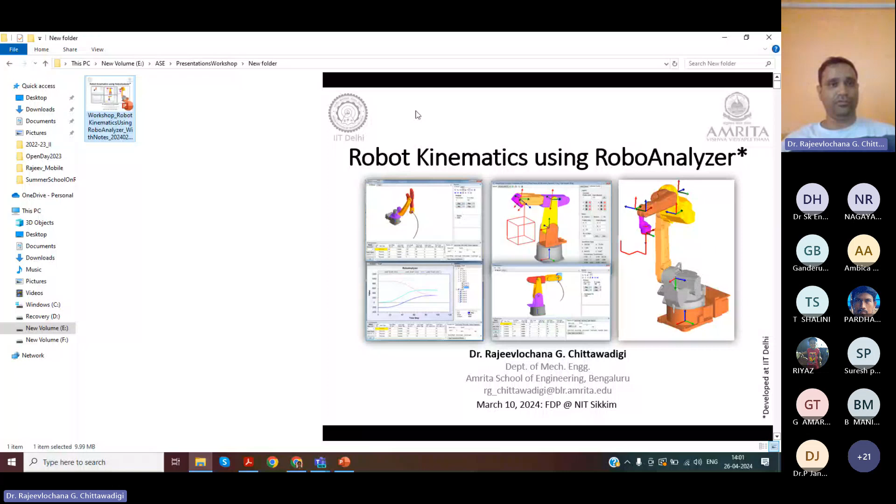Let me show you a folder which has all the sessions that I have conducted so far. My first session was in 2016, all the way to today's session at Vasireddy Venkatadri Institute of Technology. Just a count of it, you can see it is almost 53, so more than 50 sessions have happened like this. Obviously there'll be a lot of learning from both sides - I'll be trying to share whatever I know, and I'll also be looking at your response in between.

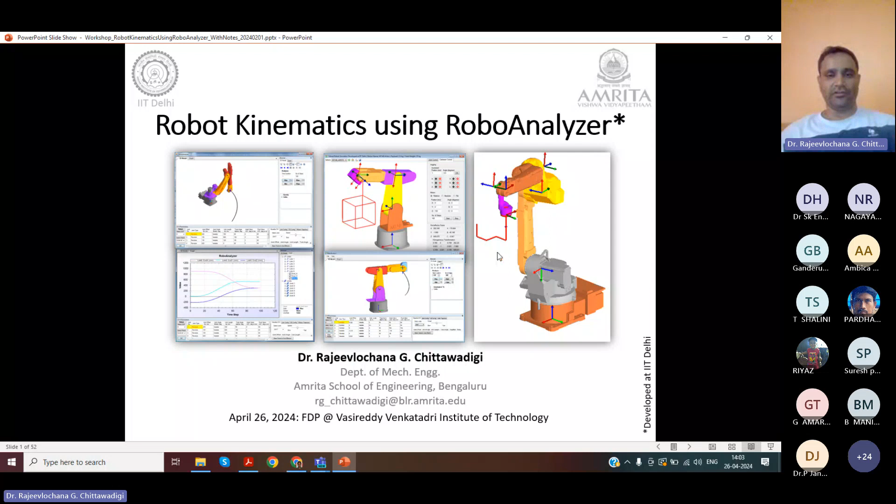The topic of my session today is robot kinematics using RoboAnalyzer. RoboAnalyzer is a software I co-developed at IIT Delhi, that is what is mentioned here. And currently I'm a faculty in Amrita Vishwa Vidyapeetham in Bangalore. These are some of the screenshots of our software, some of which I'll be demonstrating towards the end of this session.

I suppose the audience is from different aspects of engineering. So some of these topics are specific to mechanical, but otherwise, let's say robotics is interdisciplinary. So obviously, whatever simple mathematics that we'll be covering, it is applicable to many fields, including computer graphics and CAD. Here are some of the contents that we'll be covering.

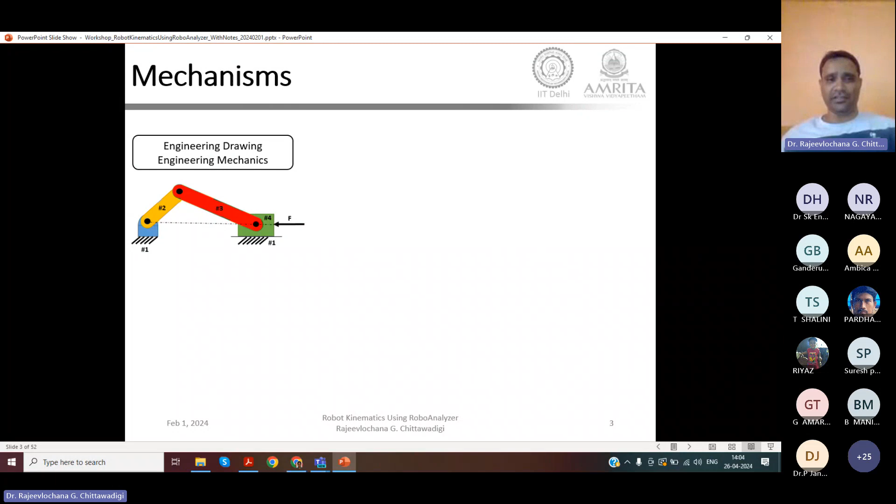For those who belong to mechanical or otherwise, when we go to robots, we have to study certain topics. This is also the way the curriculum of engineering, especially mechanical engineering, is structured. We deal with subjects such as engineering drawing, engineering mechanics, which was also sometimes common to other branches. Then specifically, we deal with machine drawing, kinematics of mechanisms, and also we have to learn programming.

If you don't know programming, it is very difficult to survive in this engineering market. So once all this is covered, then we deal with other subjects such as strength of materials and dynamics of machines - the complexity keeps increasing. And finally, we deal with something known as design of machine elements, where the exact shape and material are selected, and also stress analysis and other things are covered.

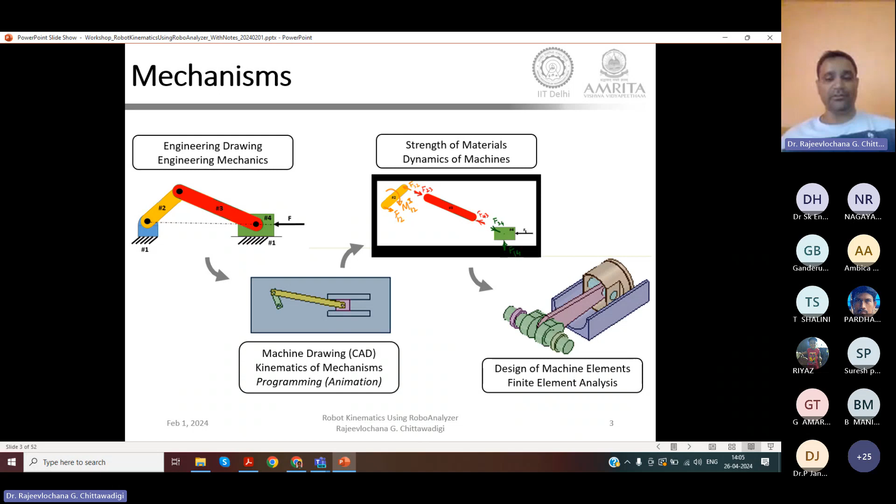So these become precursor or prerequisite courses to the robotics course, because robotics only comes after all these courses.

Some of you already have heard of the word mechatronics. Mechatronics is a combination of mechanical, electronics or electrical, and computer science. Typically, mechatronics systems are not multi-purpose, meaning you have a system that works only for one particular application. For example, FASTag at a toll gate: when a vehicle comes, the FASTag RFID sticker is sensed, it computes, and the gate opens. As you can see, it has an interdisciplinary nature, and it's a perfect example of mechatronics. Robotics, I would say, is part of mechatronics, but also slightly different.

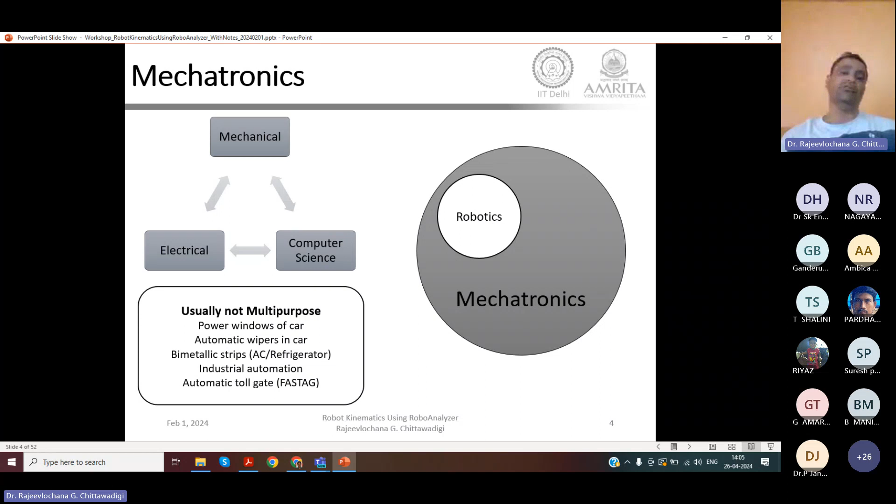How is it different? Robotics is a field related to a robot. What is a robot? That will come next. Robotics deals with the study of mathematical models where input and output characteristics are understood. Then we deal with the design of a robot, where different dimensions and components are chosen. Then we develop a physical prototype and a virtual prototype, which is very important when you actually make a robot. Then we have to apply it for some good cause.

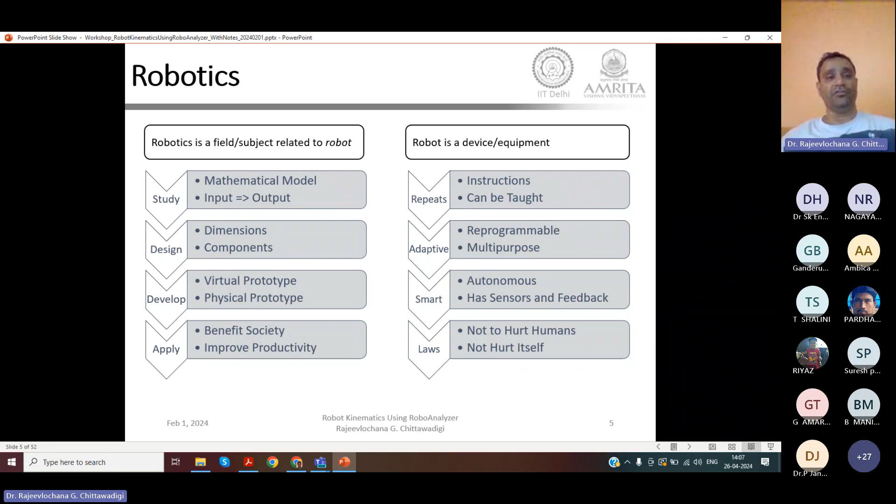What is a robot? It is a device or an equipment. Here are some keywords you should know: a robot repeats instructions, it can be taught, and it is adaptive in nature, meaning you can reprogram it and make it multi-purpose. It is also smart, because it has sensors and can take automatic or autonomous decisions. Finally, a robot has to follow certain laws. The summary of these laws is it should not hurt humans, nor should it hurt itself. So this is, very briefly, what robotics is.

Now I would like to give some insight on what is a robot and what it is not. For example, this small device has two wheels, motors, a circuit, and buttons. Depending on which buttons you press, it can go front and back, rotate, and make a turn. This means it can operate, but it is fixed automation. There is no sensor here, no intelligence here. So this is more like a toy, or let's say, mechatronics.

However, if you have a system like this, which has sensors, programming, and an input-output setup, which can take its own decision, then that becomes a robot. That means it can do multi-purpose tasks, you can use it for different applications. So this is a simple definition or division of what is a toy and what is a robot. Many schools start saying that this is a robot, but it is definitely not a robot. It is the simplest form of, let's say, a robot, but we can't be happy with this as a robot.

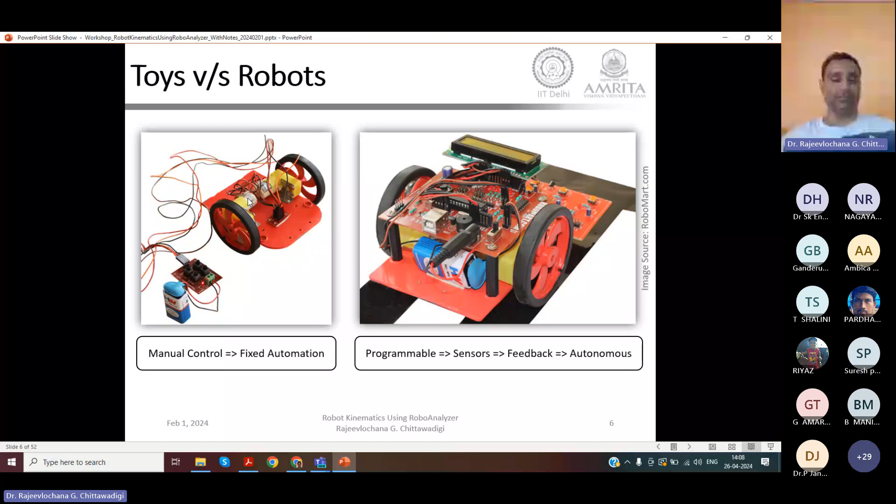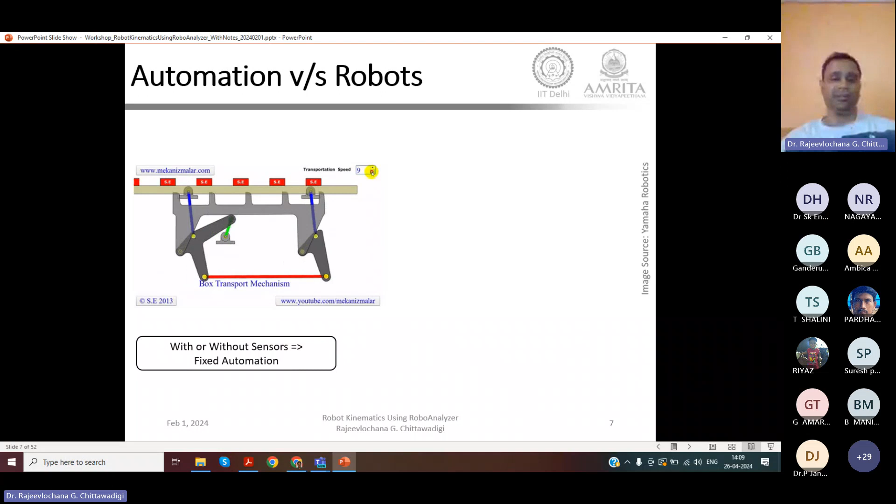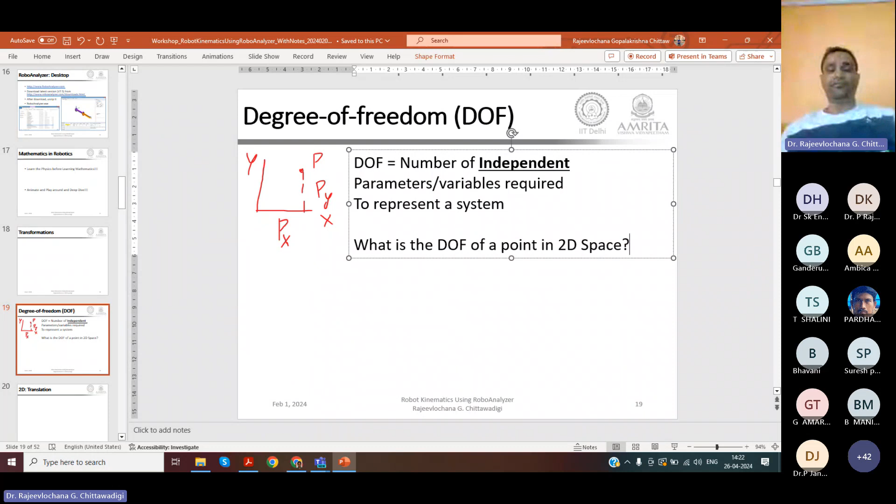I can choose any random value of Px, any random value of Py. So what is the degree of freedom of this particular point? What is the degree of freedom of a point in 2D space? Can you please type the answer in chat? X and Y coordinate - I want a number. Suresh sir says 2, Janardhan sir says 3. Anyone else? Two, Bhavani ma'am says 2. So it's a number, degree of freedom is a number. So that means we need two parameters, px and py, to represent a particular point.

Okay, now let me just try to use a different scenario.

The same point P, can we represent using polar coordinates? Yes, we all have studied this. So where we have a particular point P represented using r and theta. Here also, if I just give you the value of r and theta, you will be able to locate point P. So that means the degree of freedom of that point is still 2.

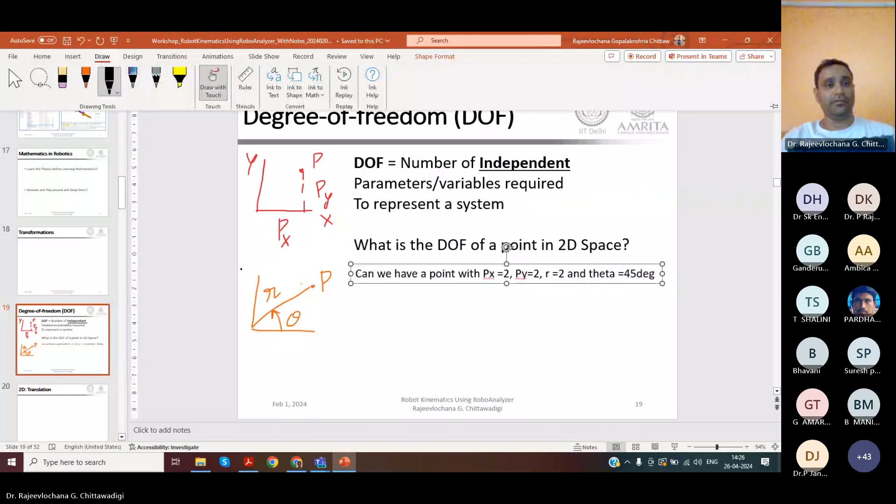Can we have a point with px equal to 2, py equal to 2, and r equal to 2, theta equal to 45? No, it is not possible. Why? Geometrically, that doesn't make any sense. This is py, this is px. If this side is 2, this is 2. R square is equal to px square plus py square, since it's a right angle triangle. So this r value has to be 2 root 2, it can't be 2.

Let's see what people have said. Correct, so 2 square root of 2. Yes, Suresh sir, that is possible. So what I meant to say was, out of these 4 values, r, theta, px, and py, only 2 can be independent and the remaining 2 have to be dependent. Now, how are they related?

Let me type it here. So we have something known as, if px and py are given, then you can write r square is equal to px square plus py square. Okay, so this we know. Another thing is tan theta is equal to py upon px. So if the value of px and py are given to you, the other two values: r is equal to square root of px square plus py square, and theta is tan inverse of py upon px. So this is what we have.

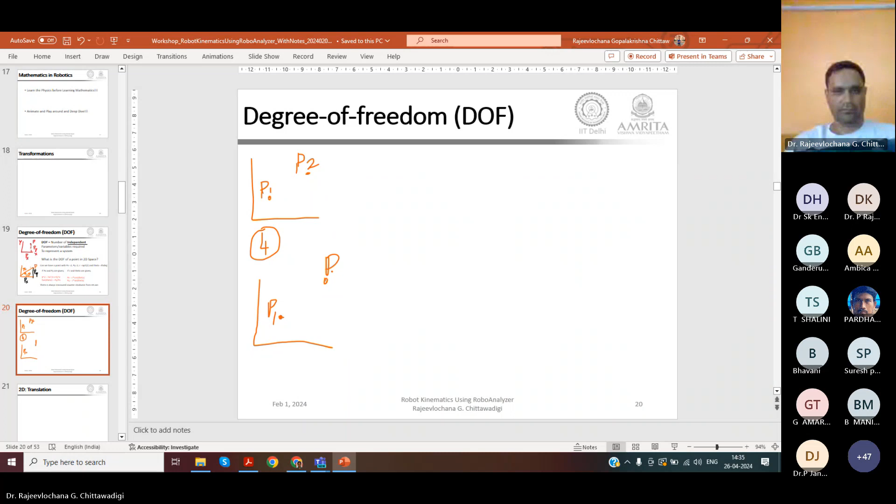Now let us try to do something else. So I'm drawing P1 and I'm drawing P2. And I decided to connect them using a spring. Now, what is the degree of freedom of this system? There's a point P1, there's another point P2, and there's a spring connected between these 2 points. Please mention the degree of freedom of the system.

Okay, Bhavani ma'am says 4, Deepika ma'am says 4. Sorry, Bhavani ma'am says 5, Deepika ma'am says 4. How about others? We'll reach robots in the next 5 minutes, so please bear with me.

Number of turns - that's interesting, number of turns. It's not important because we just have to know what is the state of the system. Number of turns, radius of the spring, length of the spring - so many factors are there. So what all are required? 4.

Okay, let me try to give it this way. When I drew the system, I drew P1 and P2. So this is exactly the same as above - I just require 4 parameters to draw 2 points. Once the parameters are fixed, then only I used a spring to connect them.

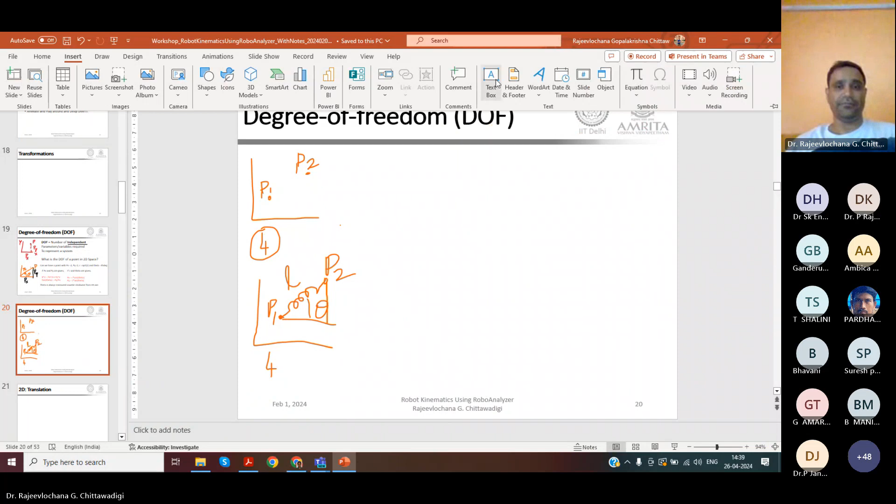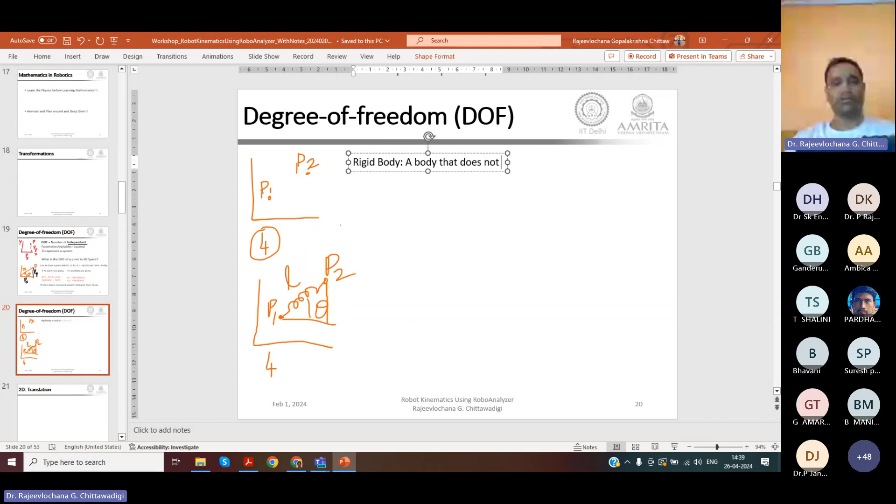A rigid body - let me give you a definition. A body that does not undergo any deformation or shape change when an external or internal force is acted on it. So that means a body that does not undergo any deformation.

Typically for practical purposes, say a mobile cover is usually flexible - if I bend it, it gets bent. However, this mobile is kind of sturdy, it doesn't change shape even if I apply some force. Some minimal change is there, but we can ignore that. Rigid body is a very important assumption in mechanics and in robotics - we assume nothing changes their shape. There's a different topic called soft robotics where you have shape-changing actuators, but that's a different story. We won't be dealing with them.

Now let me give you an example of a rigid body. Most of us are teachers, right? So we use something known as a duster on a blackboard, and we can assume the duster as a rigid body.

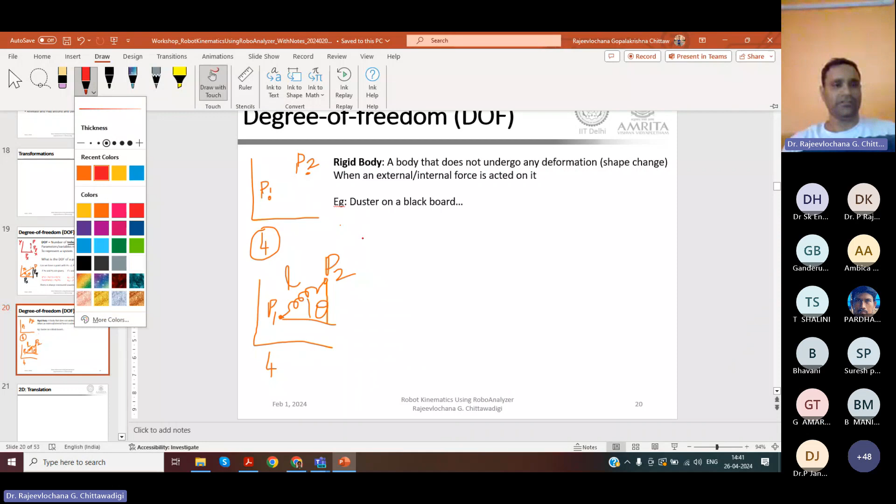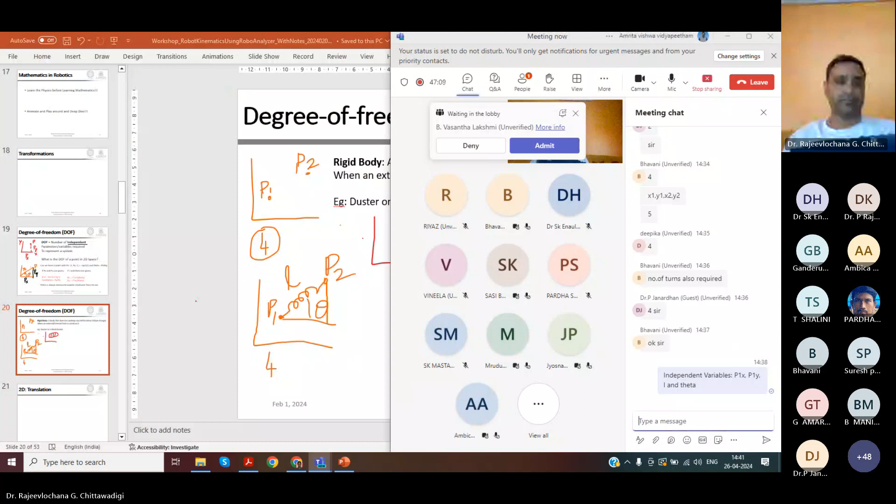Let me try to get some inputs on this rigid body now. Imagine this is a duster and I want that duster to be on the blackboard. It is on the blackboard. Now the question is: in how many directions or ways can we move this duster on a blackboard?

In how many ways can we move it? Can I translate like this such that the duster is still on the board? That's one motion. What is the third motion? I can rotate like this such that the duster is still on the board - I can just rotate the duster. So there are 3 independent motions, and that's what we are going to deal with.

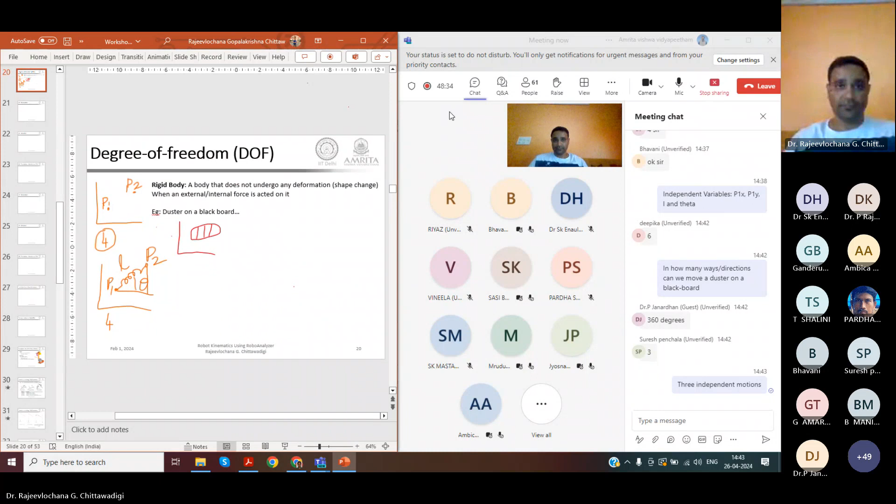This particular thing I can translate like this - I'll call it translation in the X direction. Then I can translate like this in the Y direction. And I can also rotate it. Now this rotation - if X and Y is here, the Z axis is coming out of the plane, out of the board. So this rotation is nothing but rotation about the Z axis.

That means we have a new definition of degrees of freedom: the number of independent motions possible in a system. Tx, though it is in opposite directions, we consider them as one motion because it's just a change of sign - one side positive, another negative. Similarly for Ty and R. So that's why one of the teachers mentioned 6, but 6 is not the correct answer - 3 is the correct answer. 3 independent motions are possible.

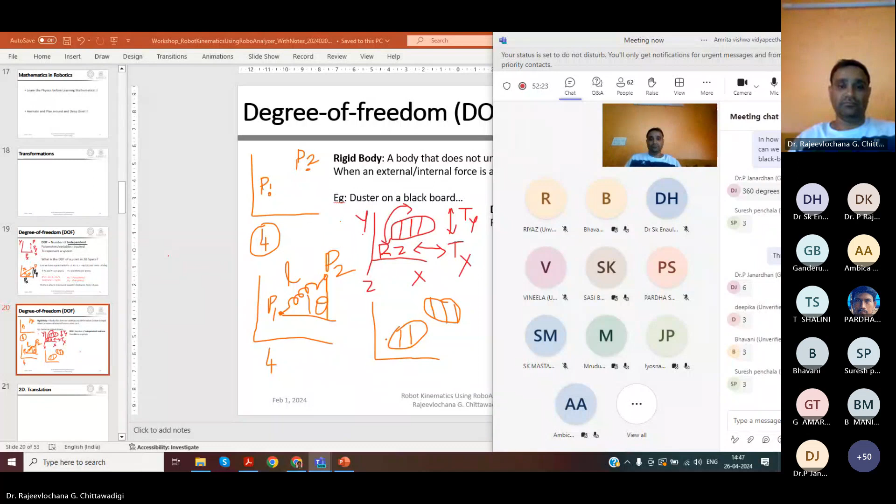This guy, I can translate it. This also I can translate, and I can rotate it. Similarly, this also I can translate in 2 directions and I can rotate in the Z direction. So the total degree of freedom of this system is 6 - 3 for the first body, 3 for the second body.

Okay, I think now people are getting it.

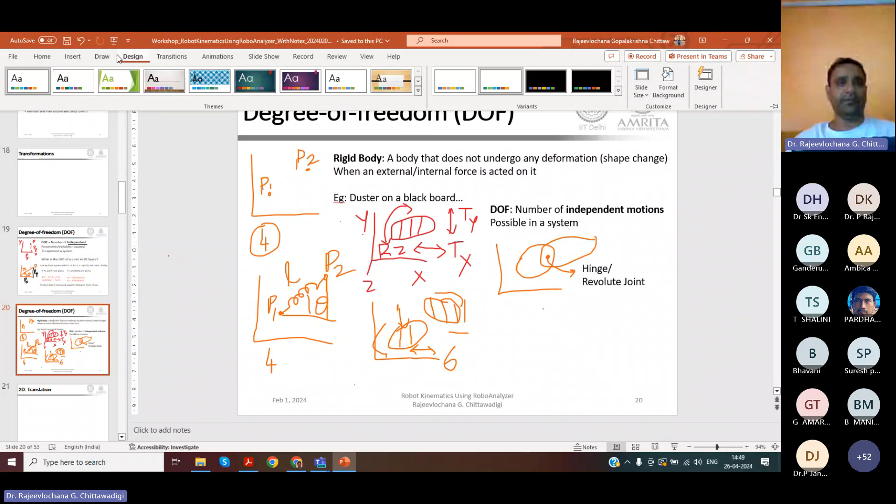So this is body number 1, this is body number 2. What is the degree of freedom of this system?

Okay, others are not answering. There are two bodies. Body number 1 is also free to move, I haven't fixed it.

Anti-clockwise and clockwise are actually the same, one side is positive, one side is negative. So there's a trick in this question. What is the trick? I've not fixed any body, so that means the first body will have 3 motions. I can move the first body freely.

It is not fixed, but the second body cannot have 3 motions because it has some constraint. So I can only have a relative rotation possible between body 1 and 2. This is four degrees of freedom: the first body requires 3 degrees of freedom, the second body just requires 1 rotation. That rotation is an independent motion - I can move it, I can lock it, I can do whatever I want. So degree of freedom of this system is 4.

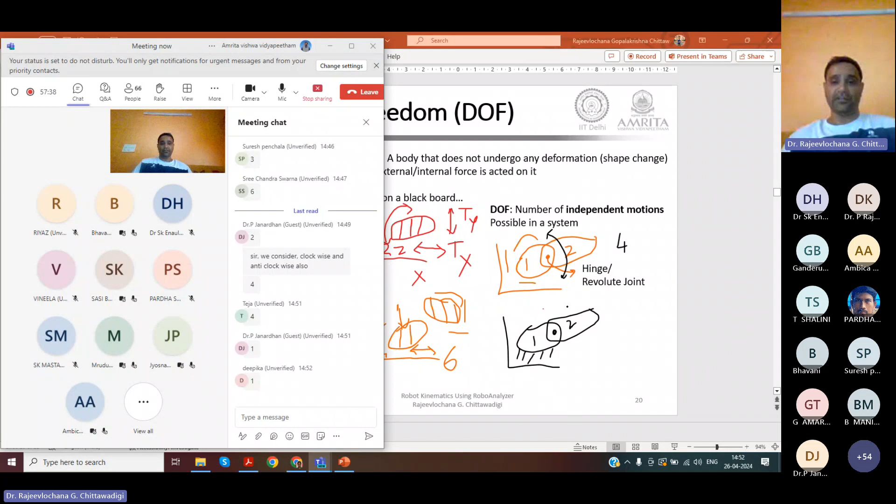Yes, Janardhan sir and Deepika ma'am, degree of freedom is correct. There is only one relative rotation possible. So that means degree of freedom of the system is 1 - only one motion is possible.

Some more examples and then we'll go for the next topic.

Okay, now we have looked at a system. Now let me try to make another system. Please pardon my drawing, I'm using my laptop pad.

These are the bodies, and wherever I'm drawing small black circles, they are our revolute joints or hinges, which allow relative rotation. Can you please type the degree of freedom of the system? Please understand the drawing is very important - you should focus on the drawing and then come up with your answer. What is the degree of freedom of this system? It looks like a human - chest, torso, neck, arm, forearm.

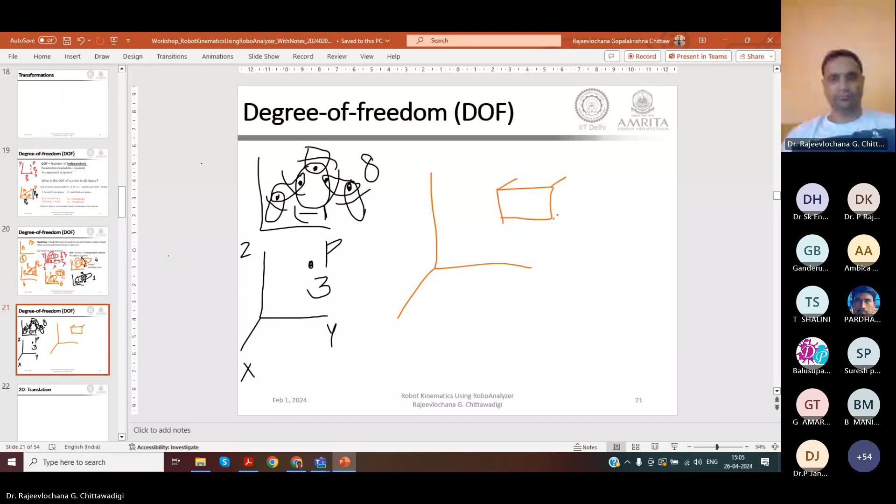Okay, now obviously I can translate in this direction. I can translate in this direction. Similarly, I can translate in this direction. So 3 translations is fine.

Now there are also 3 rotations possible. Let me demonstrate using this rigid body. I can translate in the direction like this, in the direction like this, in the direction like this — 3 independent. Rotation: please observe, I'm rotating about an axis coming towards you, rotating about a horizontal axis, and rotating about a vertical axis. Okay, so there are 3 degrees of freedom.

So translation and 3 as rotation. Total is 6: 3 translation, 3 rotation, total is 6 DOF.

So this is also another important thing that we have to deal with in robots. What is the degree of freedom of a robot? That is one of the common questions that we deal with. Okay, perfect.

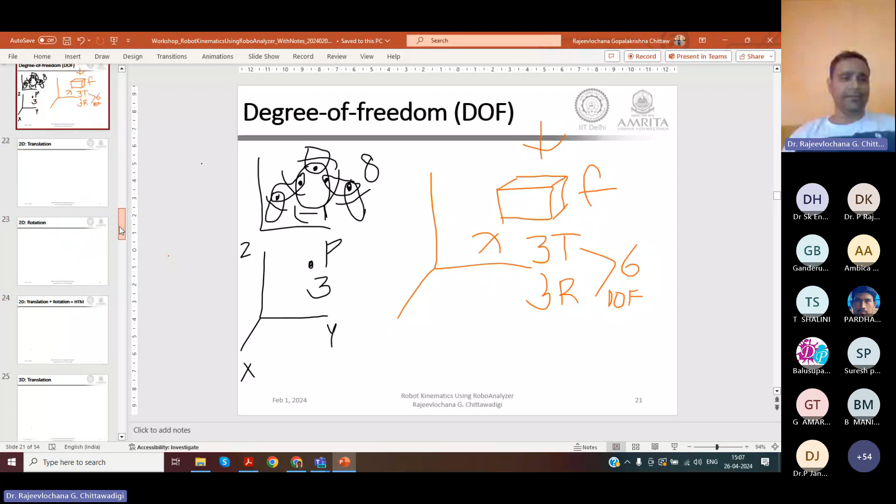Now let me try to cover the other topics slightly fast because we have to cover many things in the next half an hour. So, 2D translation: let's say I have a frame XY.

And I have another frame, let's say UV, another coordinate frame. Earlier, these 2 frames were coinciding. I have one frame, I have another frame, they were coinciding, and I have moved one of them. So the motion that has happened is basically translation. I can translate in this direction.

And similarly, I can translate in this direction. So what is the degree of freedom of this system? If I fix the XY frame, the UV frame is able to move. I can move this frame in two directions — I can translate along X, I can translate along Y. Okay, now the same thing, I can say that I have put it on a rigid body.

So there is a rigid body and I have attached a frame on top of it. So we still have X, Y, and this is U and V. If I just do the translation of this rigid body, I'll require two parameters: translation along X and translation along Y. This information can be given using a vector, let's call it D vector, between O and O prime. D vector will be a two-dimensional vector, so we'll write it in column format. It will have dx and dy. These are two independent parameters. So if I want to represent 2D translation, I can use this vector.

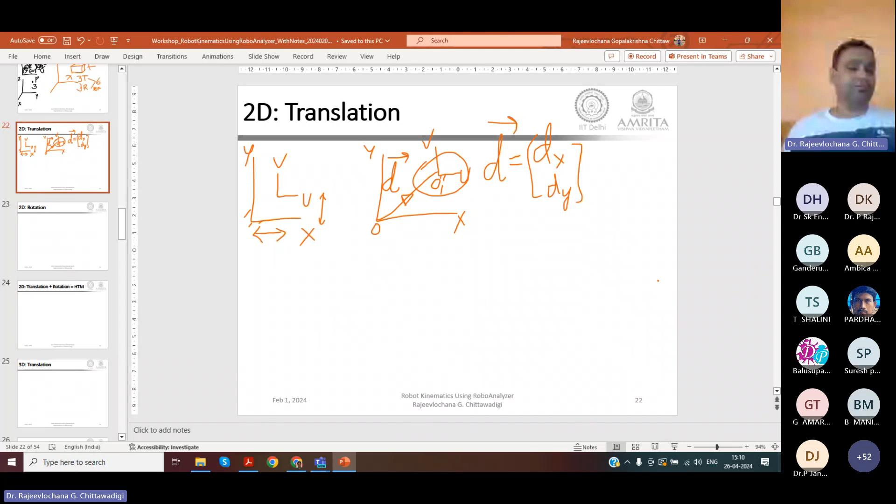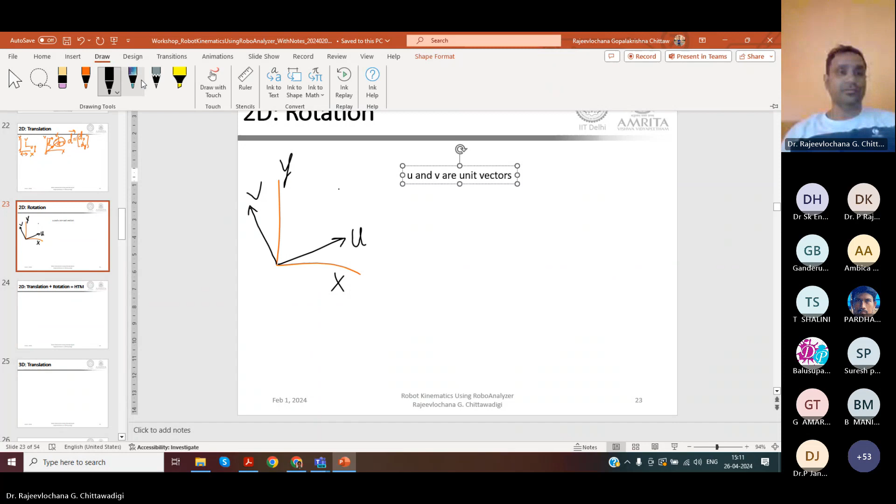Now if I want to represent this system, I will require an angle, let's say theta. If I give you the value of theta, you'll be able to draw this U and V vector straightforward. This is okay for the 2D case, but when we go to the 3-dimensional case, the way angles are specified becomes confusing, because here there's only one angle, but there will be 3 angles — what order we rotate, about which axis we rotate. There are so many things that happen. So one of the easier ways to represent rotation is using something known as direction cosine.

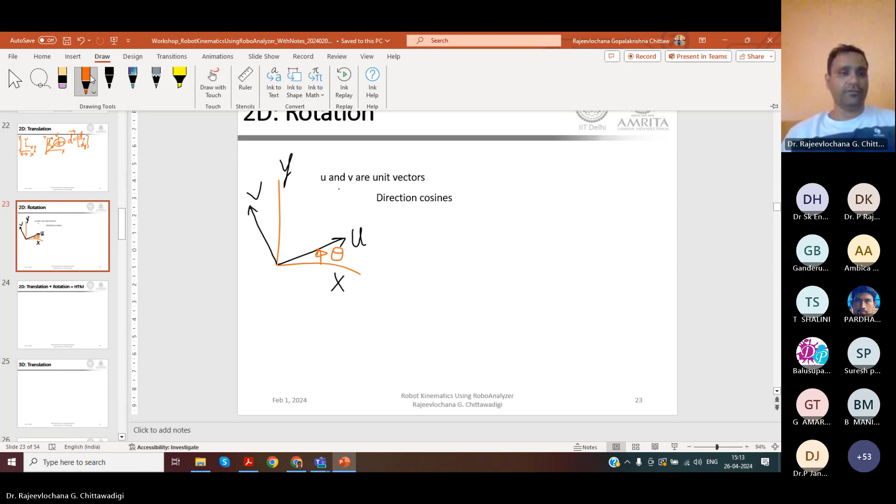So we deal with something known as direction cosine. That means we are going to represent these U and V vectors. Let me start writing. The u vector, similar to the dx dy vector — see, we have not translated it, it's still at origin, so this is a vector. If this is a right angle triangle, u vector can be written as ux and uy. X component of u, because it's a vector — a 2D vector will have two components, an x component and a y component.

Now we assume that the length of this u is 1. You remember the r cos theta, r sin theta form? That's very important because it will come handy here. So ux is going to be 1 cos theta, which is nothing but cos theta — I'll just write c theta. And uy is going to be 1 sin theta, so that is going to be sin theta.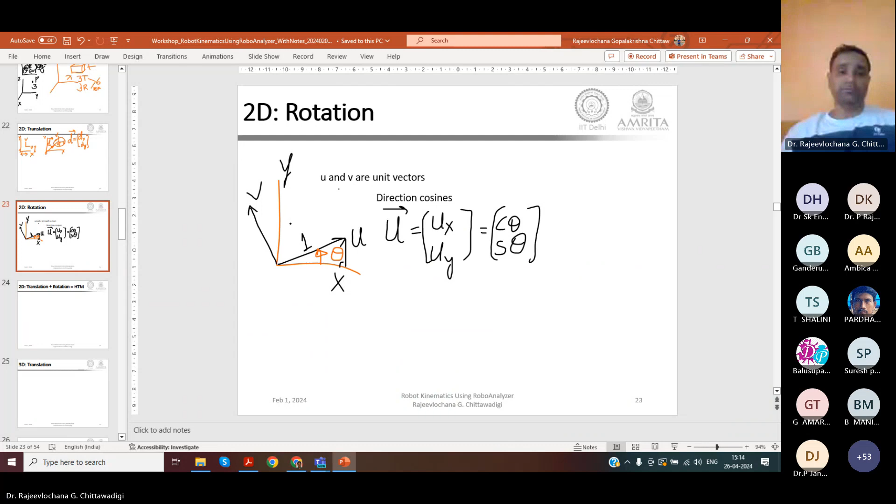Simple. Now we have to write v, another vector. This is where the assumption of measuring the angle from the positive x-axis is very important. So the angle till u is theta, so from the x-axis, the angle till v will be theta plus 90 degrees, or 90 degrees plus theta. So the v vector, which is vx and vy, will then become — please bear with me, I have to write slowly.

So this is again going to be in r cos and r sin form. The only thing is it is going to have 1 into cos of 90 plus theta, which is the angle measured with respect to the positive x-axis. When we deal with such a system, you don't have to worry about where the angle is given — this angle is also theta, so I can always say I want to measure with respect to this. But simplest is to measure all angles with respect to the positive x-axis, and you don't have to worry about the sign. If you remember the ASTC form, it takes care of the positive and negative sign of the value depending on theta.

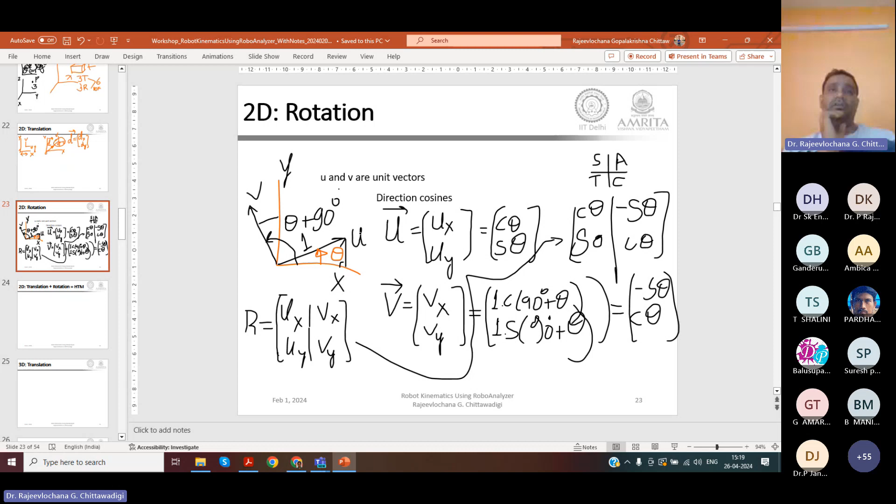So rotation, when we do rotation of a frame with respect to another, we just need one angle, because that is the one relative degree of freedom, theta. But to have it useful in certain applications, as I'll clarify in the next slide, we represent this rotation in the form of direction cosines. That means components of the u vector and components of the v vector arranged in a 2x2 matrix. So that is what we have written, R.

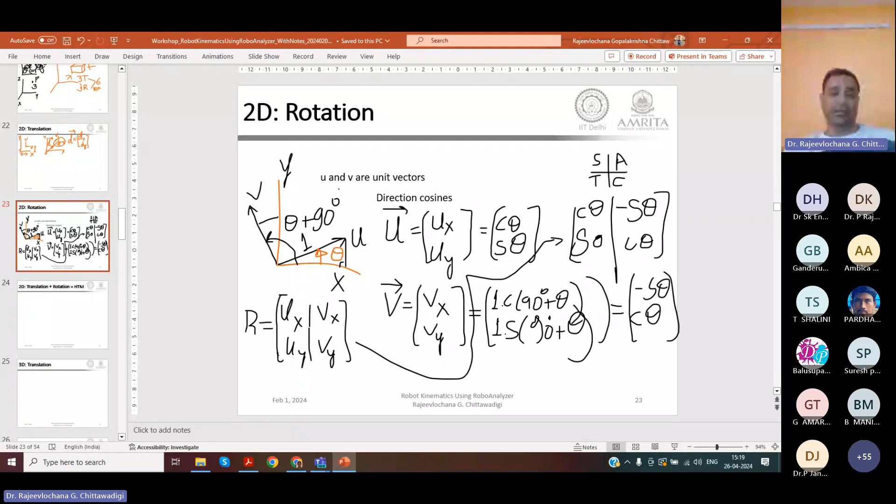Now obviously, if I have a frame, it can translate and also it can rotate. When we have such things, we need both pieces of information put into one matrix, so we call it HTM. HTM stands for homogeneous transformation matrix.

So let us look at this particular scenario. I have an XY frame which is fixed, and I have a UV frame which is rotated like this. We can represent the translation using a D vector, there's nothing wrong in that. And this angle, we'll call it theta, the angle with respect to the positive x-axis. So I have drawn one parallel line, and we have measured the angle with respect to that.

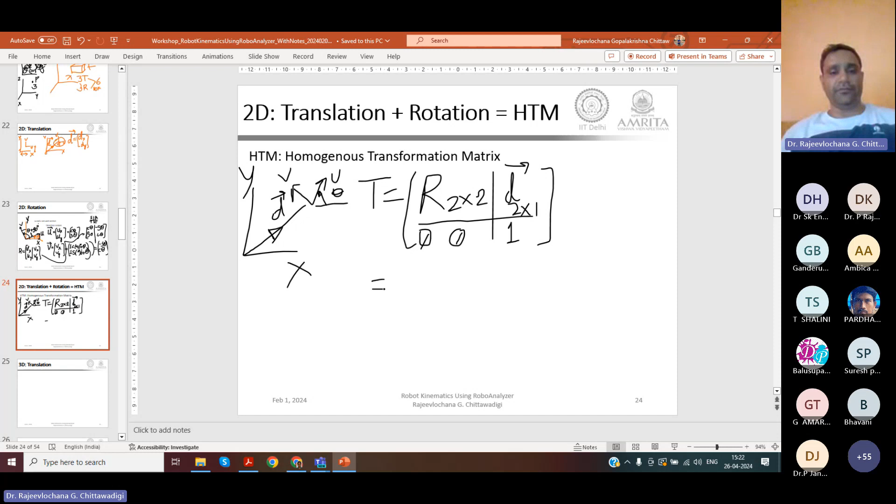So the last row will look like this: 0, 0, 1 - this is 0, this is 0, and there is a 1. Let me try to write it in a different manner. So R was basically cos theta, sin theta, and minus sin theta, cos theta, then dx, dy. These equations are fundamental - in robotics, computer graphics, and CAD, we have to deal with all these equations. Then 0, 0, 1.

So this is what a homogeneous transformation represents, both translation and rotation - dx, dy correspond to translation, theta corresponds to rotation. So when we put them together, we have to add one additional row, which corresponds to 0, 0, 1. Similarly, we have 3D translation, rotation, homogeneous transformation, and other things, which I'll demonstrate right now.

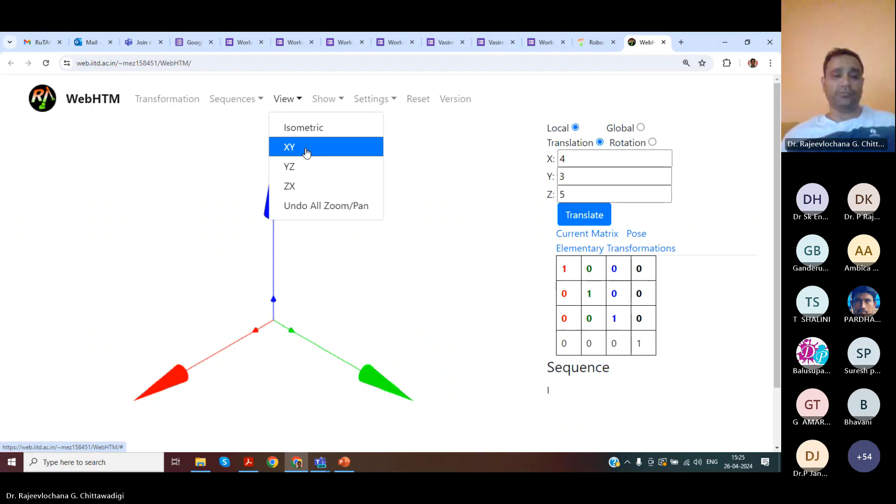Now this corresponds to two 3D coordinate systems. The bigger one is, let's say, XYZ, and then there's a smaller one, which is UVW. Now, to understand whatever we have done so far, let me just go to the side view, also the top view. You can see that both the frames are coinciding.

Now, if I give dx as 4 and dy as 3, and click on translate, you can see that it moved - so this is pure translation. I was able to translate the UVW frame. Let me call this 2D, because later we'll go to 3D, but this view is nothing but 2D. Now, somewhere here, we also have reset - reset means it goes back to the earlier system.

So if we want to rotate, we'll rotate about the Z axis by, let's say, 30 degrees. If I rotate, the frame rotated - you can observe here, I've given theta, and accordingly it moved. So we have covered pure translation, pure rotation. We can also do combined.

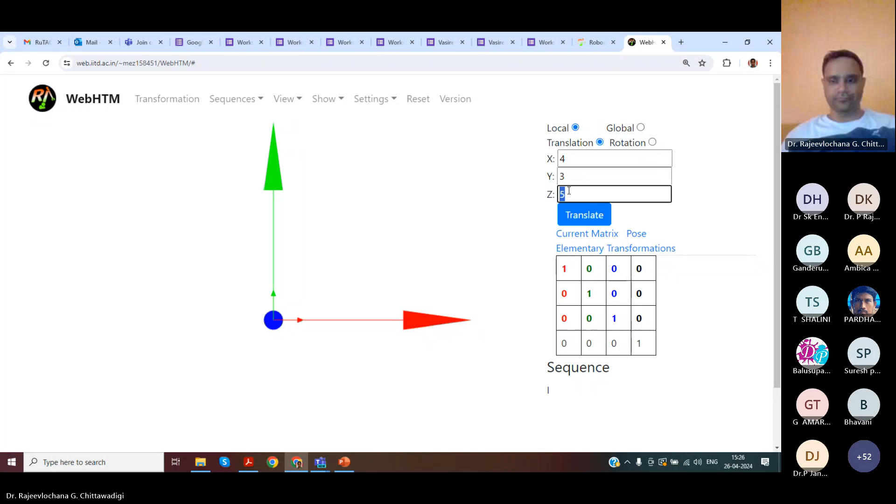After translating, I can rotate. So this is what happens, I can keep rotating. If you've observed your PowerPoint slides, sometimes something keeps bouncing, there's a rotation that happens, or when you look at a movie or marriage video, some animation keeps happening. In all those animations, these underlying graphics transformations are used. Without what we have covered so far, none of the animated movies can be produced.

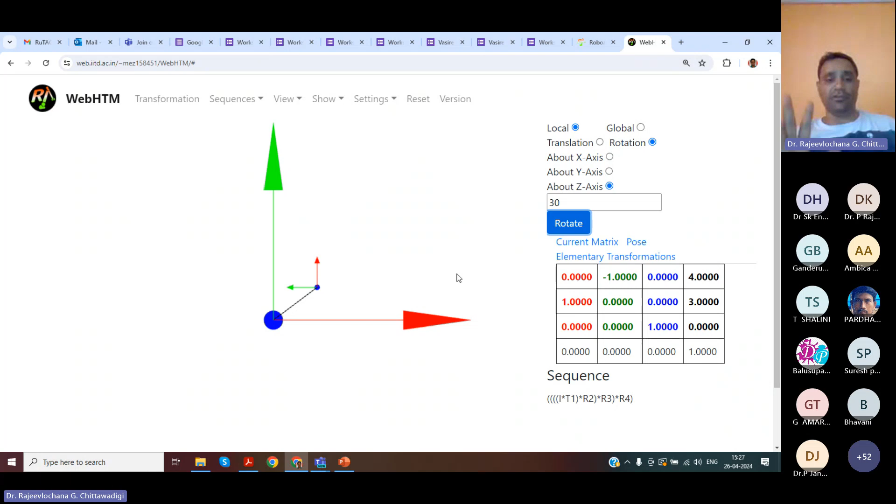Now this is for the two-dimensional case where we are able to understand something on HTM. Okay, let me go back.

I'll very quickly explain 3D translation. If I have UVW frame, XYZ frame, the d vector is given by dx, dy, dz. I need to hurry up because in the next 15 minutes I have to stop. So there is UVW frame, there's XYZ frame, I can translate. So when I do translate, there's no rotation.

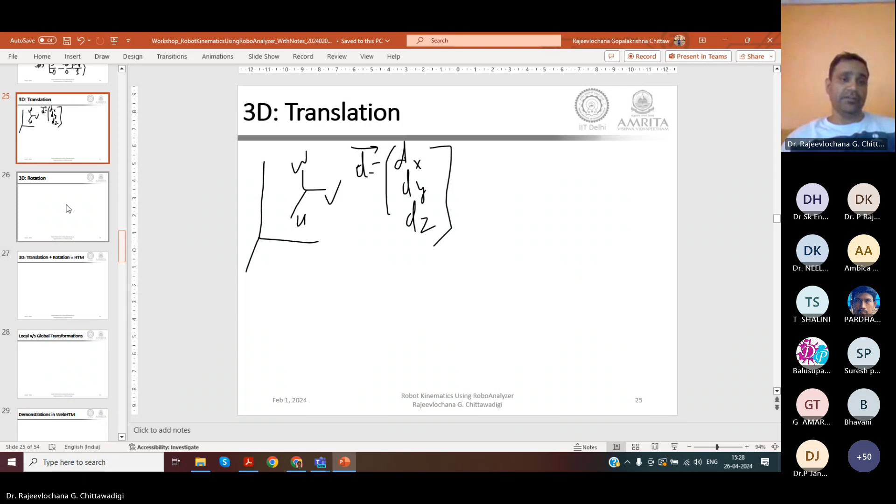Similarly, if I do 3D rotation, so if I have U, V, W, now the rotation matrix, let's say I use Q or letter R, is given by, it's similar to the 2D stuff. So we assume U, V, W as unit vectors.

Length is 1. That means this will have X component, UX, UY, and UZ. So this is the first column. Similarly, it will have Vx, Vy, Vz. These are the components of a vector, I'll explain in the software. Similarly, Wx, Wy, Wz. I hope you are all writing it down because these are the stuffs we'll be using again in the next slide.

Now, obviously there are 9 elements here. These 9 elements can't be random, I can't have 1, 2, 3, 4, 5, 6, 7, 8, 9. Because if you remember X, Y, R, theta, there was some constraint. There are 3 rotations, so that means there should be 6 constraint equations. So what are the constraint equations?

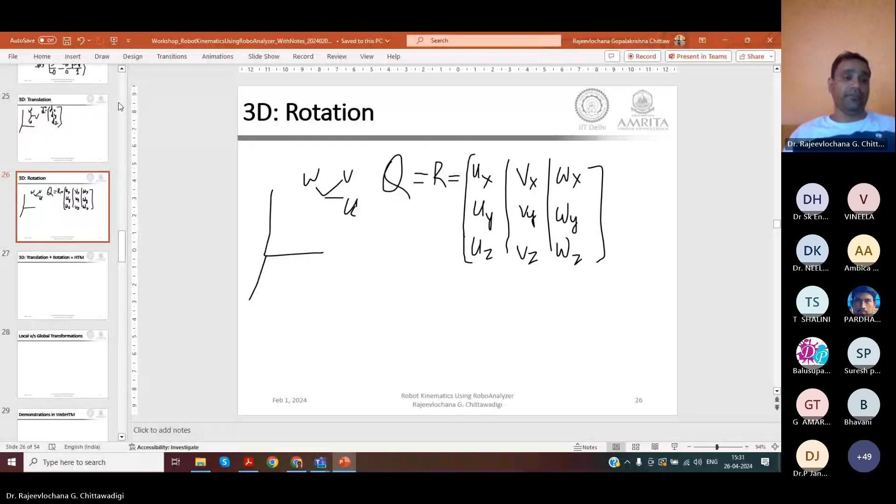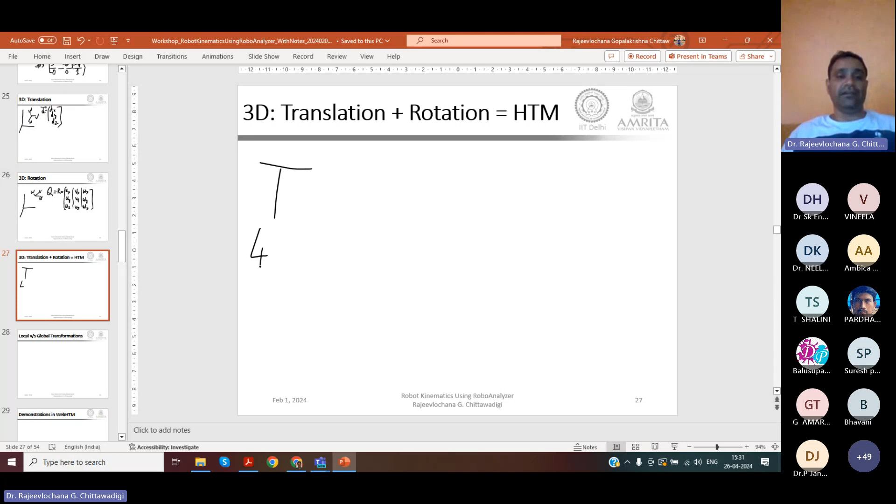Now 3D HTM: if I want to write information of translation and rotation together, I'll have to write it in a 4x4 matrix. You remember translation was in the last column, so I can write translation here: dx, dy, and dz. And after dz we'll have 1, that's kind of a thumb rule for you, you don't have to worry why it is 1.

Similarly, the last row, remember it is a 4x4 matrix, so one column is already taken, we'll have 3 more columns: 0, 0, 0. So this one.

Okay, so Ux, Uy, Uz, all these things will come here. It's the Q matrix which was 3 cross 3 from the previous slide: Ux, Uy, Uz, Vx, Vy, Vz, Wx, Wy, Wz. So all this information can be put in one matrix, and we call that the homogeneous transformation matrix.

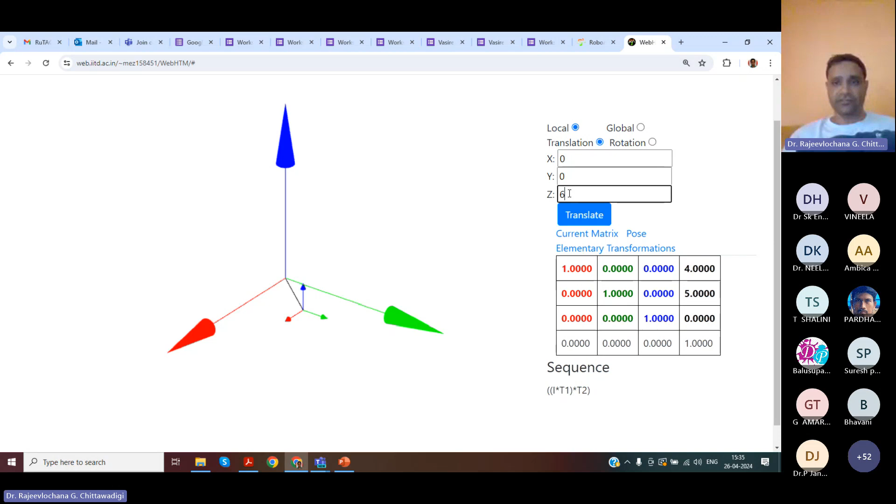Similarly, I can just do translation along the z direction. Let me just translate. So we translated along z direction, which looks like this. It has moved up. Earlier it was in the xy plane. So now the effective transformation is it has not undergone any rotation. However, for translation, it has undergone 4, 5, and 6.

OK, I'll reset. So we have understood what is translation. Now let's try to understand what is rotation.

See about the Z axis. If I rotate by 45 degrees, what will happen is, so you saw a rotation happening, and the projection of this Ux, Uy, Uz.

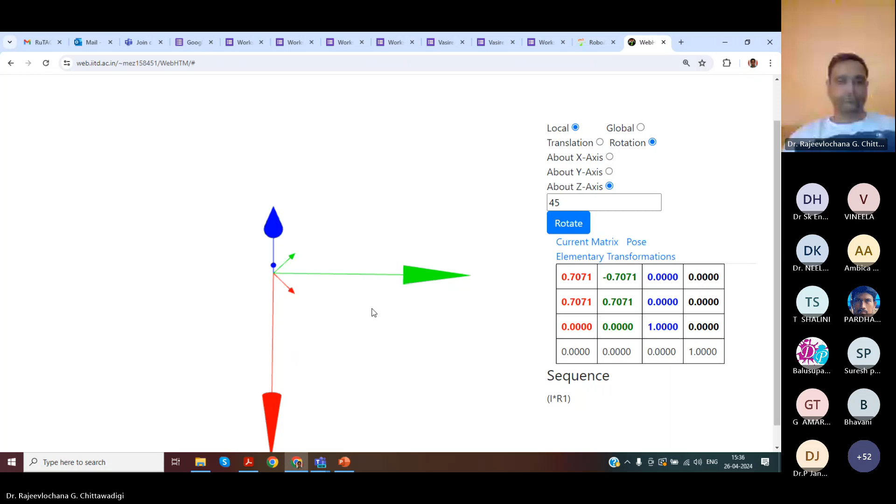OK, now this is the U vector. The components of the U vector are its shadow along the x-axis. So this is the x-axis. If I cast a shadow, this much will be Ux. It is given by R cos theta, cos 45.

Similarly, along the y-axis, the shadow, if I put a light from here, it will be this much. This is R sin theta. So R cos theta, cos 45 here, is 1 by root 2. This is the value. Sin theta. Then the last row will be 0 in this case. Cos theta, sin theta, 0.

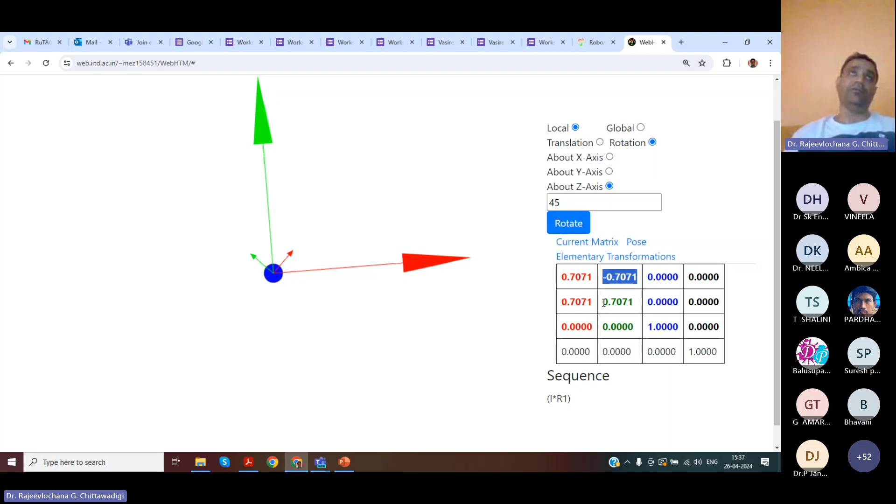Now this one is 90 plus 45, that is 135. OK, cos 135 is Vx. If you remember, cos is negative in the second quadrant. Right, so that is why.

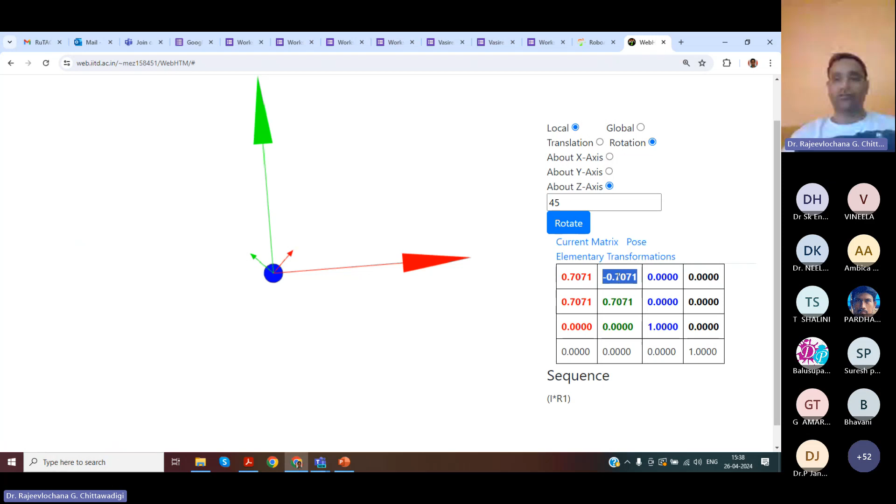Sorry, what did I do? Sorry, I forgot, we still consider 45 because we have already done that part. So this is minus sin theta. If you remember in this slide, it is there, this one: minus sin theta, then cos theta. So minus of sin 45 plus cos 45, 0.

Then the blue one is undisturbed. So that means these two axes are parallel. So that is why the z-axis or w-axis is parallel to the z-axis, and that is why it is 0, 0, 1.

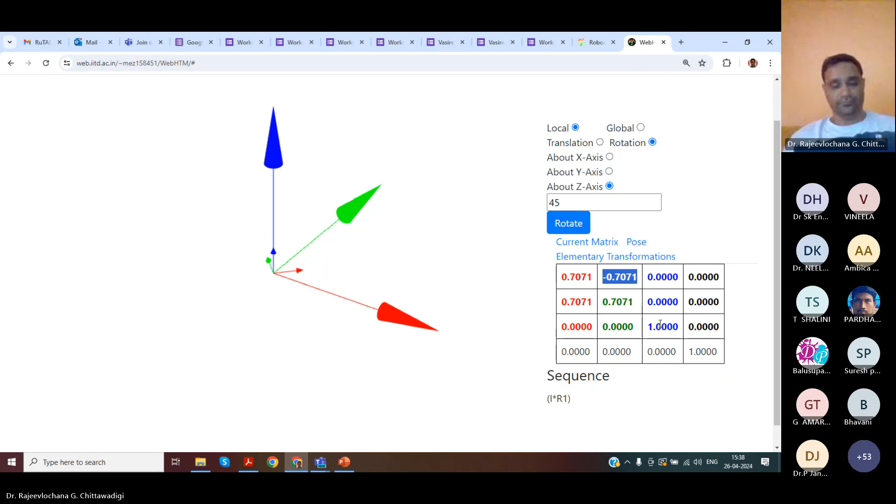So by performing these motions, we were able to generate the homogeneous transformation matrix, because it corresponds to the independent motions that we have done. So similarly, you can play around with different motions that are possible along this.

So for example, rotation about the x-axis. If I rotate by 90 degrees, you see it rotated and the corresponding HTM changed. Rotation about the y-axis, again, it rotated and the corresponding HTM changed.

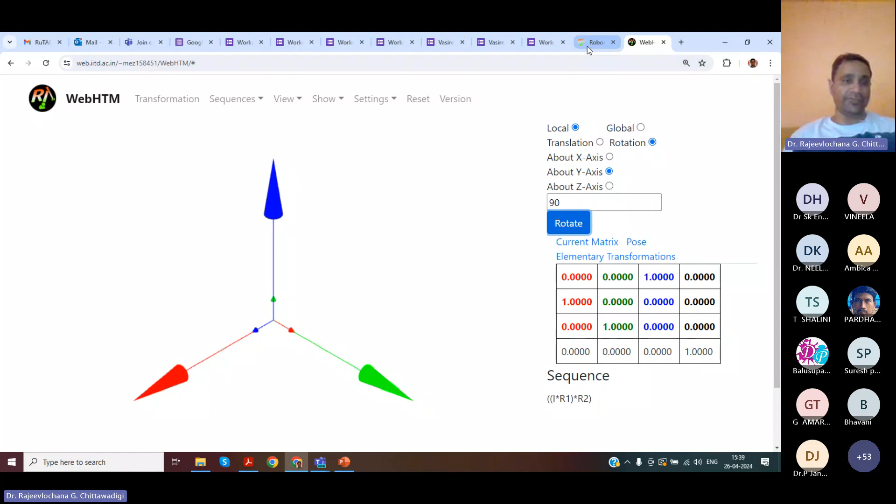OK, so this particular interface is available for free on the RoboAnalyzer website. And you have to go to web HTM, homogeneous transformation matrix. And since we are on this website, let me try to very briefly explain what this software is.

So we have developed a set of video tutorials for those who want to teach such topics. Please go through these video lectures link, there are a lot of small videos. So basically, we had one FDP in IIT Delhi, a faculty development program. During that time, we recorded all these videos, cut them, and put them on YouTube.

We conducted something known as a RoboAnalyzer based online competition. Again, during COVID, we wanted to engage our students in some useful manner. So we created a few video tutorials and conducted some competition. These video tutorials help in self-learning, similar to any NPTEL course.

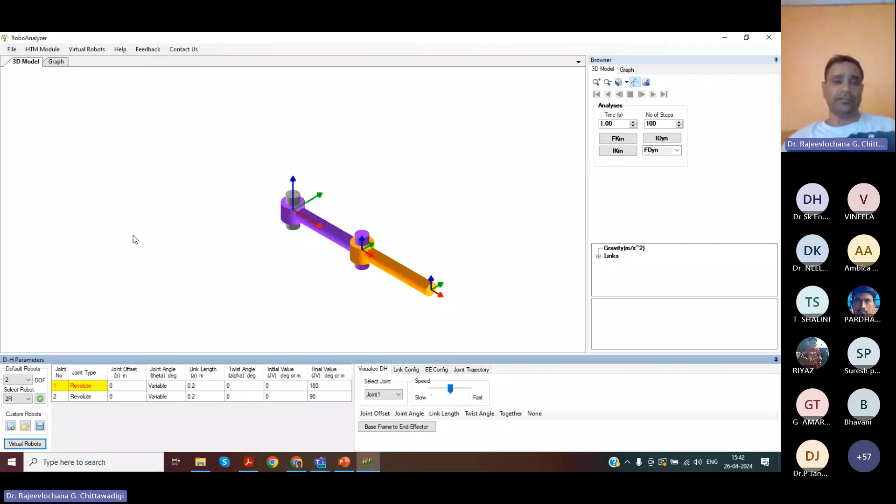This is about the homogeneous transformation matrix, and there's software available called RoboAnalyzer. Let me briefly demonstrate what it is. I have an older version which was free, but now it has become commercialized. If someone needs RoboAnalyzer, there is a partner in Pune, SVR Infotech, who can give a trial license and later an actual license. Very quickly, in 3 minutes, I'm going to demonstrate this software.

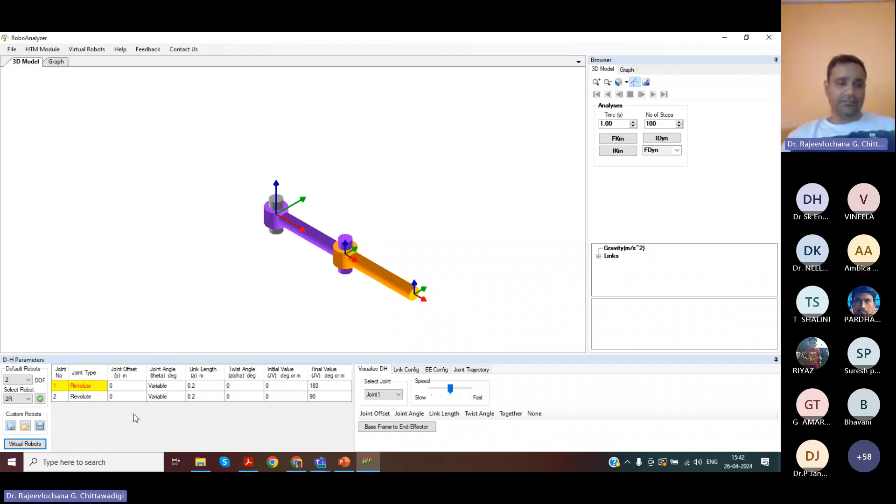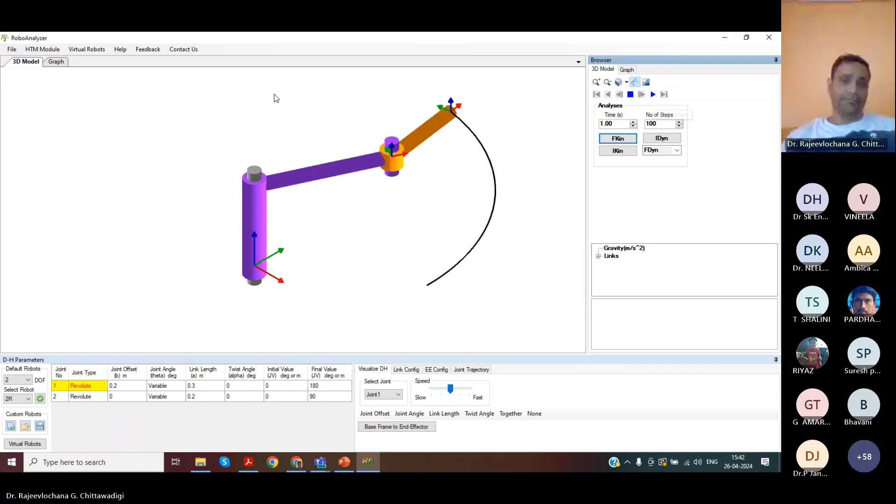So this is a simple 2R manipulator, and certain geometric information we can enter, known as DH parameters, Denavit-Hartenberg parameters, which determine the architecture of this robot. Then we can click on FKIN, forward kinematics, and observe some motion. You see the 3D model, like a CAD software. We developed this using OpenGL, Open Graphics Library, for the 3D graphics.

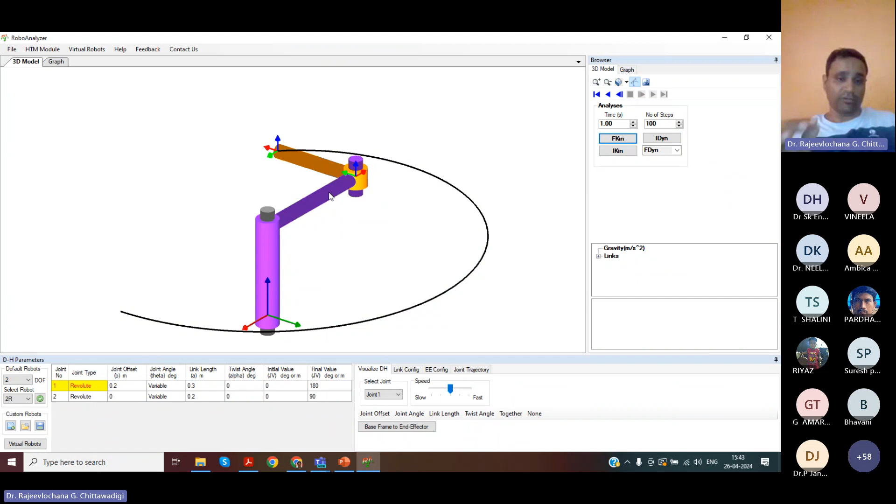But the geometry and other things were developed by me, and that is the reason why some of the topics we discussed today are very clear, because when you start doing your own product, you have better clarity. So that is the meaning of it.

So we can do some motion of this robot. If you observe, by changing one particular value from 0 to 90, I can change the shape of the robot. Earlier, both joint axes were parallel. Now it has become skew. Let's observe - it is no more parallel. Earlier it was like this, now this is like this for the next joint axis.

So for people who teach robot kinematics, we have this topic called DH parameters, Denavit-Hartenberg parameters. One can refer to these videos to understand what those DH parameters are and how RoboAnalyzer can be used in a course.

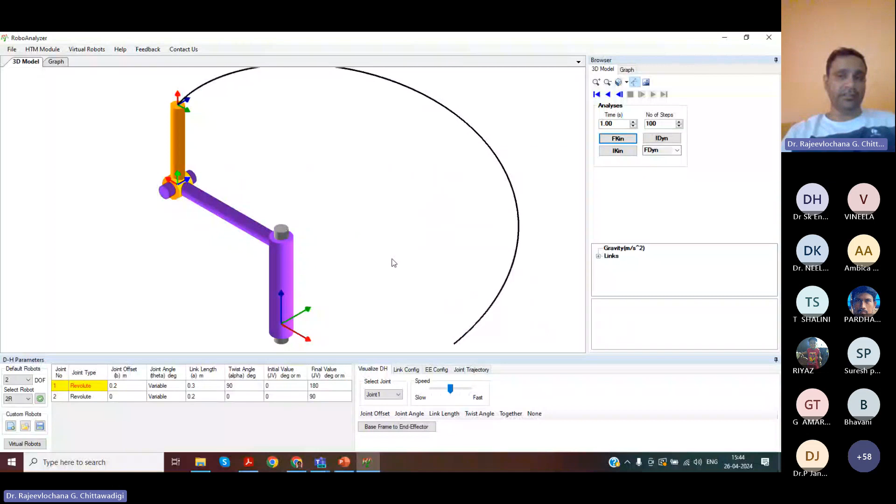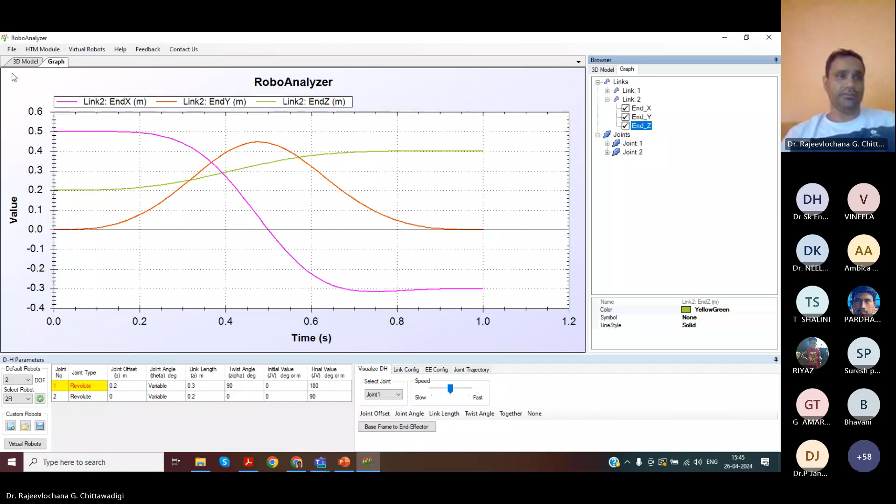So this is about forward kinematics - meaning I know the value of theta, I should know where the tip has reached. That is forward kinematics. Inverse kinematics means if I know the tip state, the position of the tip, what joint angles should I give such that I reach there.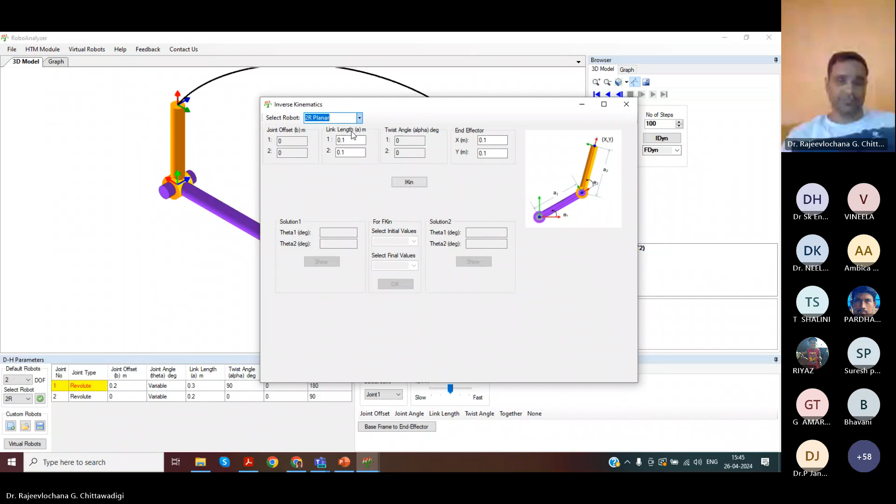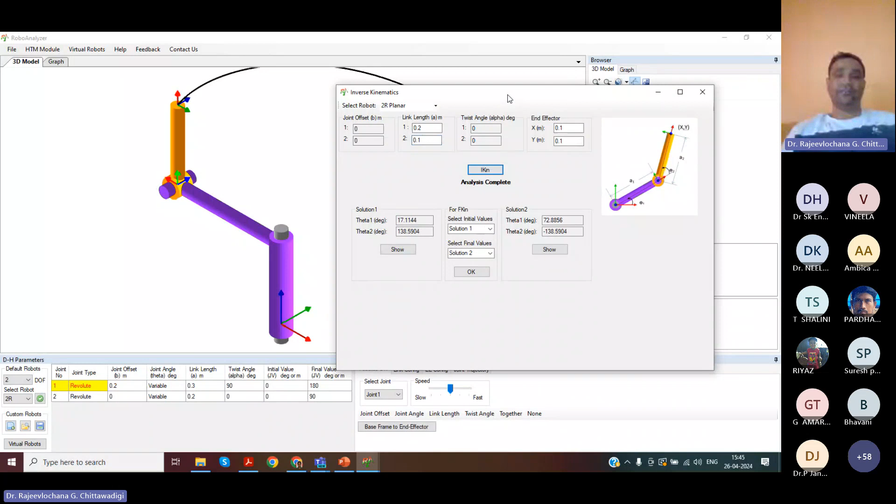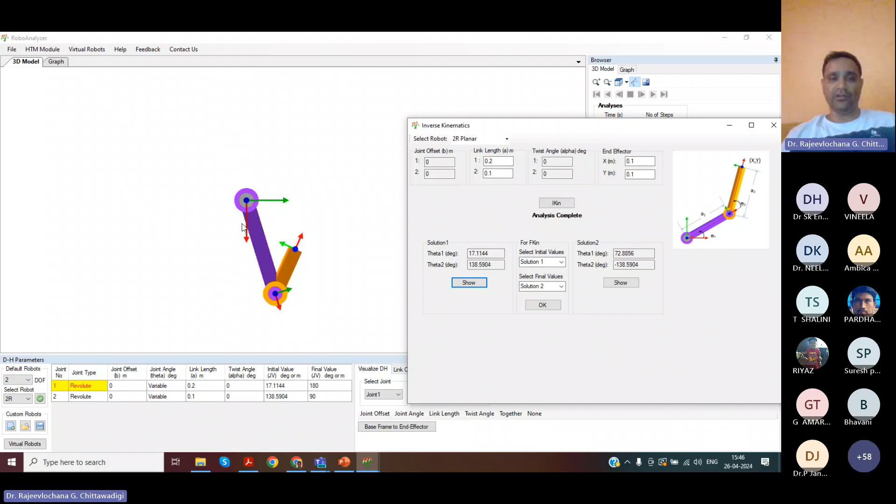So in inverse kinematics, let's take the same 2R planar robot, and I've given link lengths. We want to reach a particular end effector point. Please remember, in inverse kinematics, multiple solutions are possible. I'll go to top view. If you observe, I wanted to reach this particular point, and the joint angles required are given here, or I can choose another solution - I can flip to reach the same point, going in another direction. So two solutions are possible for a simple 2R manipulator, and depending on the situation, you can choose what you want. This is about inverse kinematics.

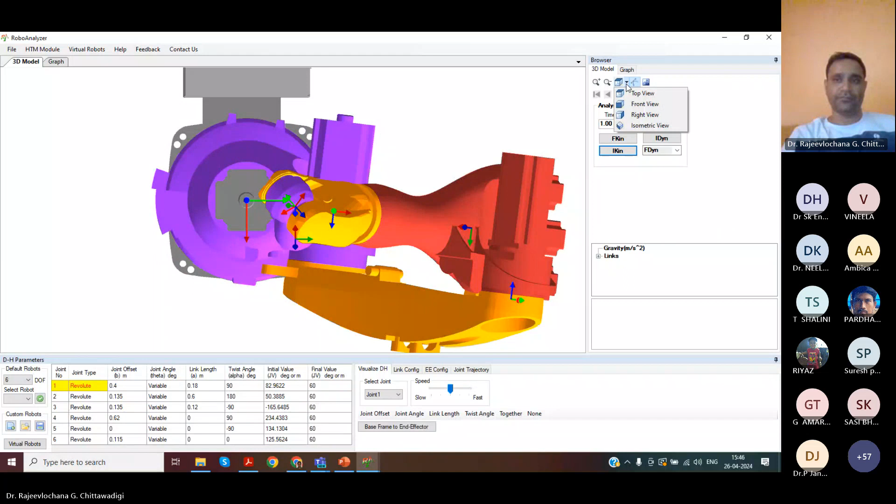There are a lot of robots available. You can look at a CAD model of a robot - for example, there is a KUKA robot. Let me go to isometric view. This is a CAD model of a robot. So I've given the robot a particular configuration to reach.

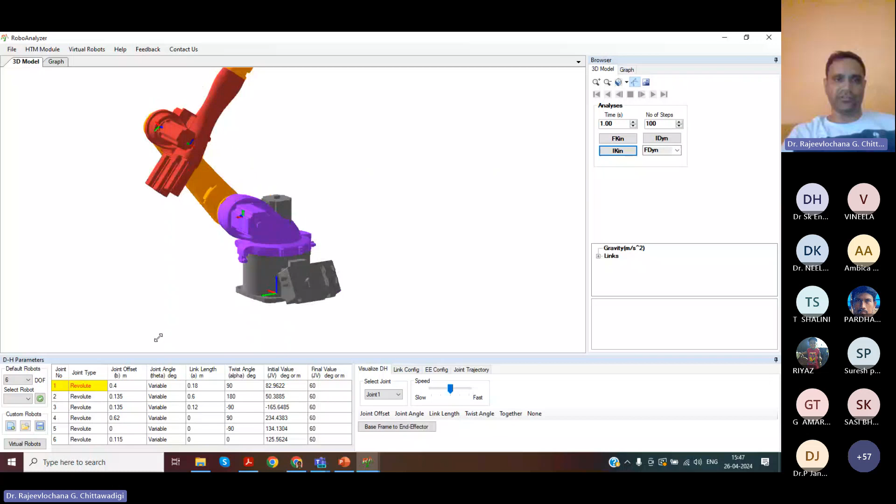Now in the inverse kinematics, I can choose which solution I want. Multiple solutions are possible, as you can see the robot changing its joint angles to still reach the same point and same orientation - we call this the orientation of the end effector.

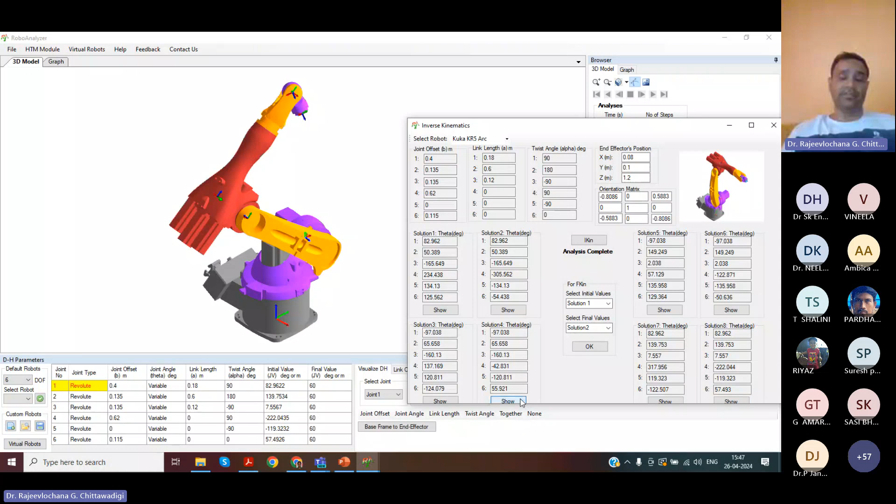So all the mathematics has been derived, and we have implemented all this in a C# application - Visual C# is used, and for graphics we have used OpenGL. This work took almost 4-5 years for completion, and later on small modules we have been adding.

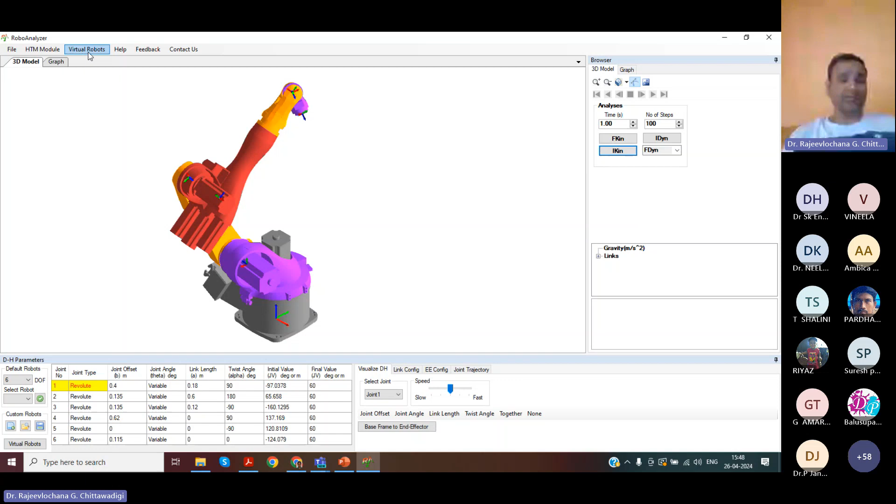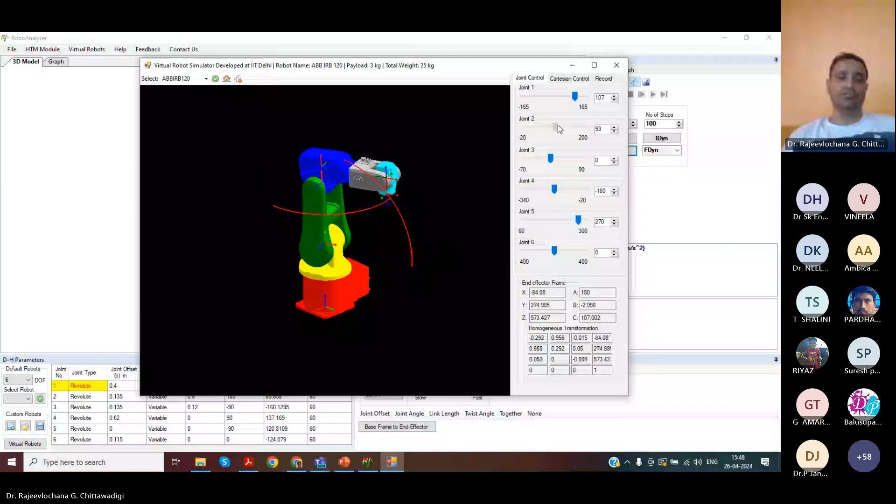Finally I'll demonstrate something known as virtual robots. Virtual robots means we can use a CAD model of a robot with joint jogging - for example, you want to see how a robot moves. This first joint is more like our waist, rotating about the vertical axis. The second is more like our shoulder. The third one is more like our elbow. Then the last three joints we call the wrist. You can see the gray color guy moving here and there, similarly cyan color rotating, and finally the red color flange is there - that is also moving.

Here you can see if I rotate this, it moves, red moves here and there, rotation. So there are 6 sliders, which means there are 6 joints. So what is the degree of freedom of this system? It is 6 degrees of freedom because I am able to control 6 motors independently. So the degree of freedom of this robot is 6.

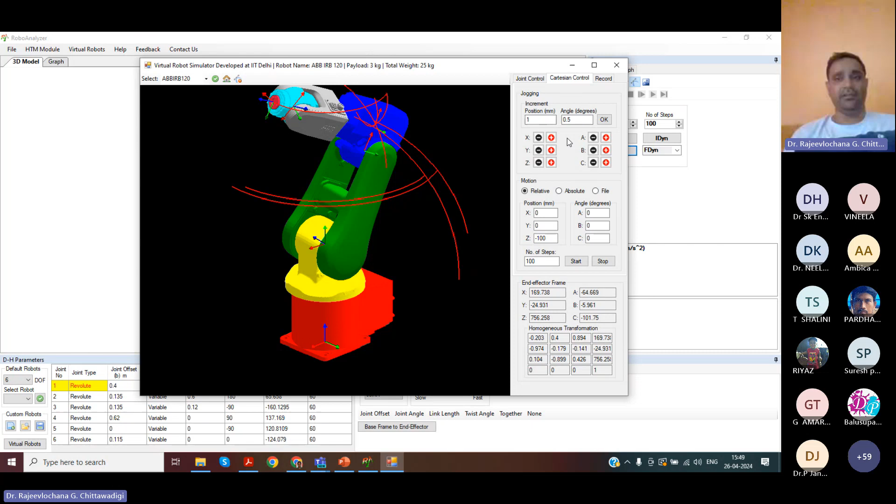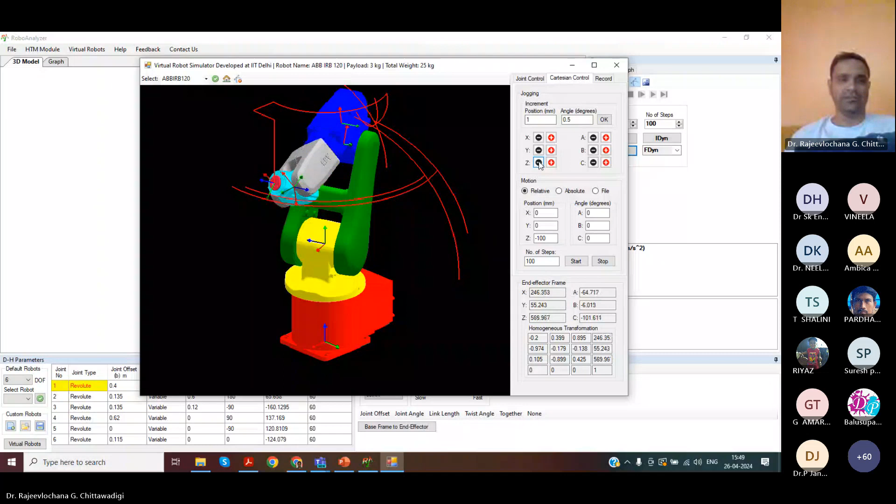Similarly, we can do something known as Cartesian jogging. I can take the robot along straight lines. You can see I'm trying to draw straight lines. The tip—see, the math and other things, it is possible to understand only if you understand the starting part of my lecture. Similarly, you can see there is a rotation that is possible. The tip is not moving now.

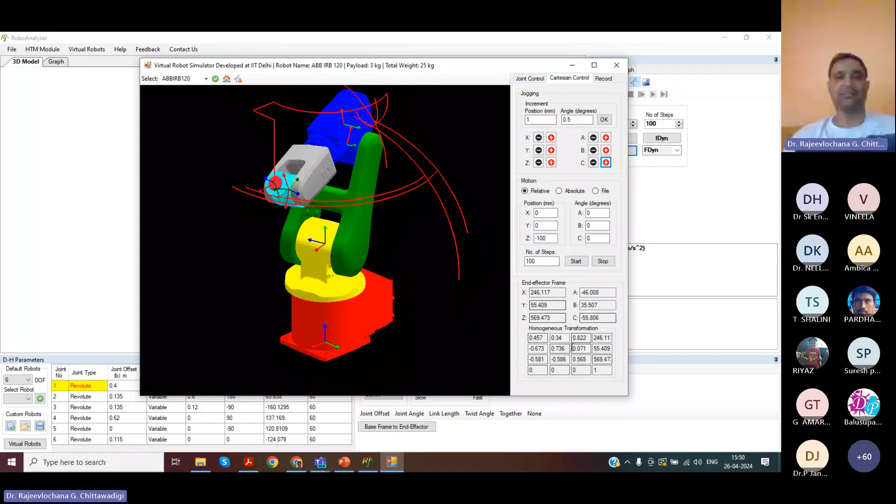I'm only changing the orientation of the tip. And when we do all this, you observe that the homogeneous transformation on the right side is changing. That means the position and orientation of the tip with respect to the base is changing in this table. That is what homogeneous transformation is.

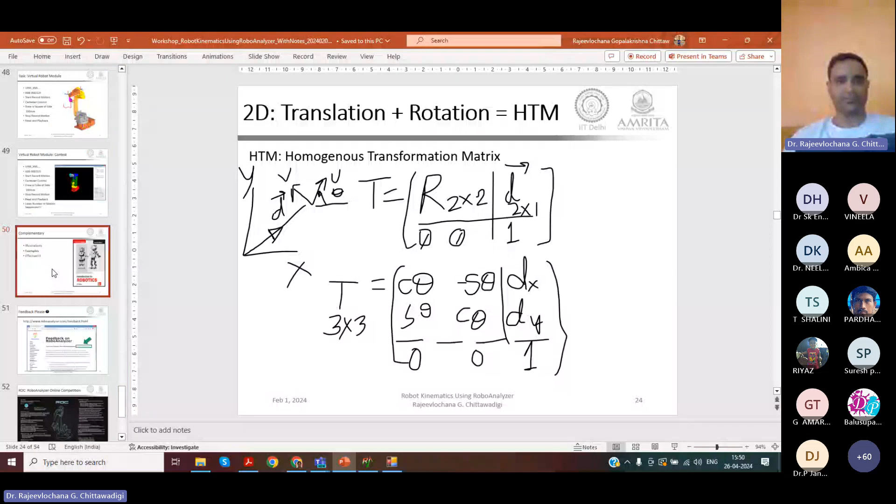My supervisor is Professor S.K. Saha, Subir Saha from IIT Delhi. He has written a textbook on robotics. When the first edition was written, I had just joined, and it was very difficult to understand just from textbooks. Since I had some experience in programming and graphics, together we came up with this software. In the next version, we have used a lot of RoboAnalyzer analogy inside the textbook.